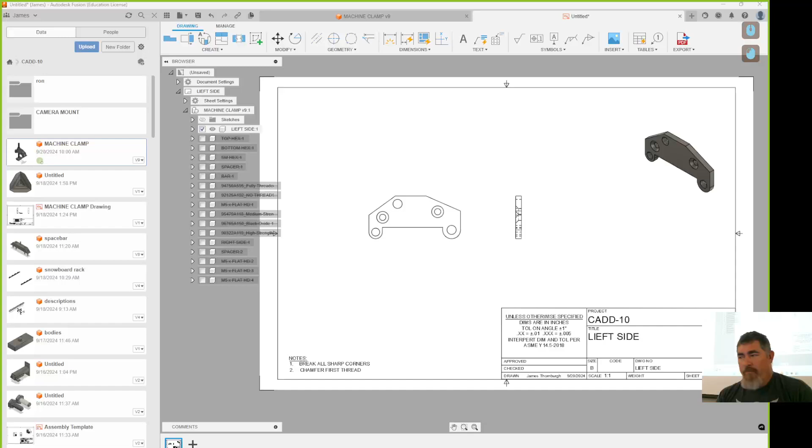If you're working on this piece, on the drawings that you're given, you had two views, right? The left view and the right view, but it was both the same, the left part and the right part, because both of them, the countersinks were solid. And one had locations of holes and one had sizes. If you're going to do it like this, you need to put all of them on one view.

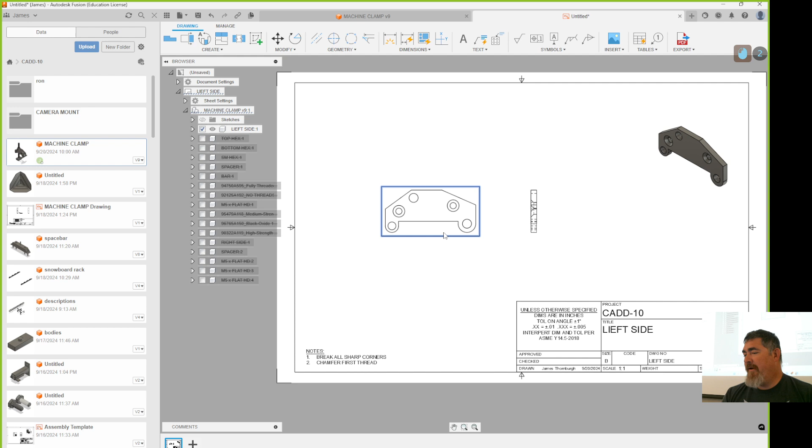So depending on what size, if you're trying to fit this on an A size sheet, you probably don't have all the space. So this is where sometimes a B size will work out. You can make it bigger. That way you have a little bit more space to work with, kind of more space around it to work with if you want.

You can also keep it small, and then from the side view, project the back view. That way you can put some stuff on this view and some stuff on this view. I would probably put all the hole stuff on one and all the outline stuff on the other, or something like that. I wouldn't do locations for the holes here and size the holes here like they did.

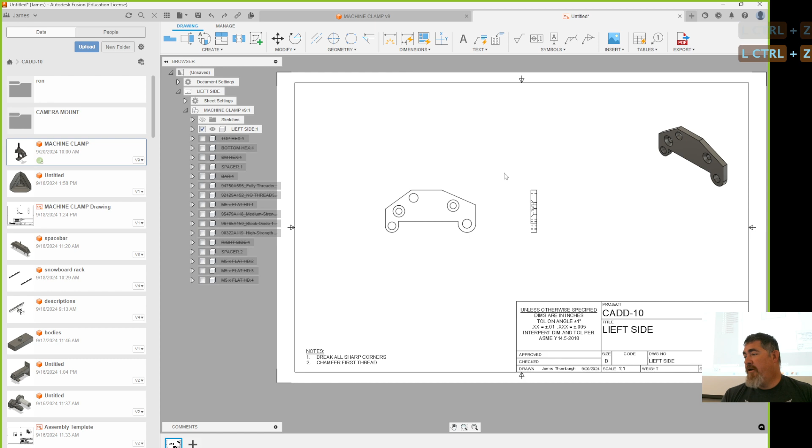I would put everything about the holes, locations and sizes, on this one. On this one, maybe mention the outside if you wanted to. Or you could put it all just on one view, make it the appropriate scale. You don't just have to stick to 1:1 or 2:1. You could do like

3:2, right? So that's 1.5. Remember, ratios are just fractions. And so you can make it 3:2. It's kind of halfway in between 1:1 and 2:1. So kind of adjust. And once you start going and you're like, oh, I want it to be a little bit bigger, just adjust the scale and then see how it fits. And if you see it doesn't fit, make that other view.

Or if you've started to put it on an A size and you're like, oh, I need more space, just make it a B size sheet. It's an easy change. Give yourself some more space to work with. Don't try and crowd it all in. Okay? Yeah.

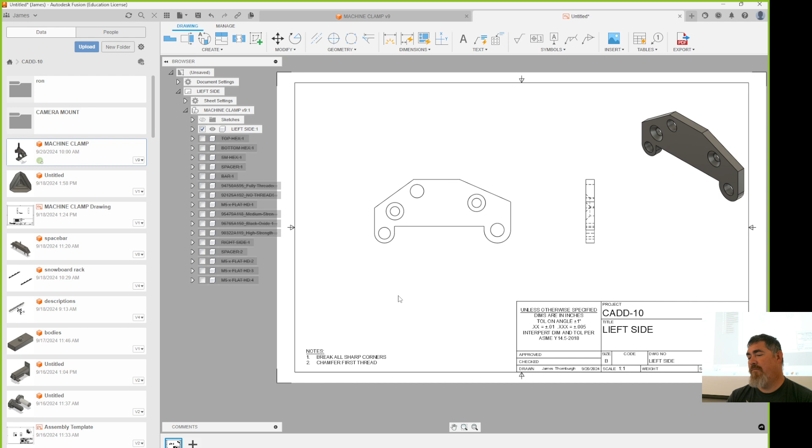Yeah, so there are some options here, but it's usually just the 1:2, 2:1 stuff. It doesn't have the 2:3 or 3:4. That's 3:2. Yeah, because I just typed it. Oh, okay. The ones above the line are what you've used so far. The ones below the line are the standards.